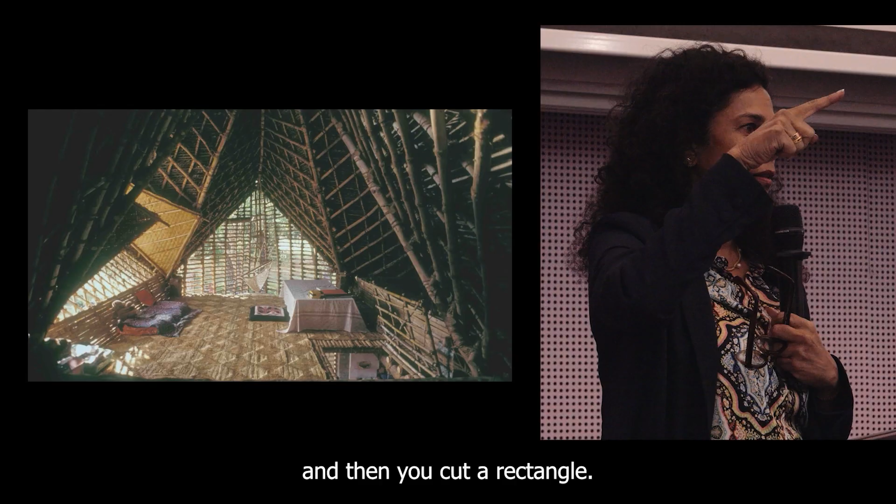The round wood—each tree is unique, but it can be harvested if round in a couple of years, 3 years or so, as opposed to 25 years, after which the tree is so big and then you cut a rectangle. These are questions to be asked by those who are driving efficiency. Is efficiency so efficient?

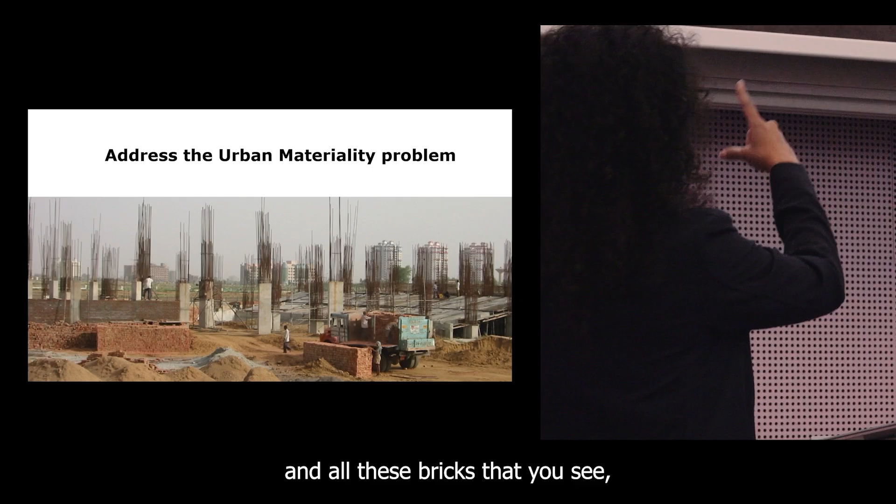Through that kind of model, the West has been driving models that are dictating the urban materiality, which I'm calling a materiality problem in the rest of the world, where even concrete is now being used as a vernacular material, and all these bricks you see are also not allowed to carry load, because alongside there is a new type of regulation world developing that is coming in the way of innovation.

So gravity has not changed, and human biology didn't change much too, yet the codes are changing. So there is this form follows regulations, form follows money—all of these as parallel developments.

In that context, I have tried in my practice to go to the source and understand that a lot of the green rating systems, etc., which are all based on generalizations, are in my opinion all wrong, because they say a brick takes so and so many kilojoules.

It's not true—it depends whether you fire it with what, where the clay is from, how much did you move things around. So a brick is not just a brick, and neither is a stone.

So I have spent a lot of research and time to find out, right from the source, how do you start to move material, and how do you create contemporary architecture with skills, etc., that include all the people who are involved—the analog, whatever we build, however you conceive it. At the end of the day, the material is analog. It will affect a quarry in a place and all the socio-economic and environmental realities that I feel are still being underestimated.

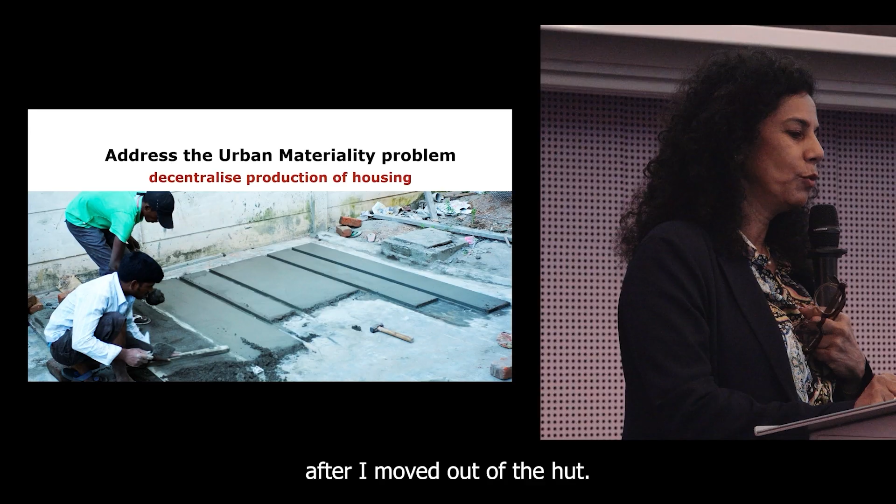There are so many codes and laws. I'm also trying to focus on research that could decentralize the production of housing, just like birds and bees still manage to build their own things. Humans are not—you need to wear hats, you need permits, as if the whole world is a war zone where you need permits just to go there.

So I'm working with ferrocement and other materials, including how to treat them—it's very much focused on the matter itself. This is some of the outcome of that, shown at the Venice Biennale in 2016, I think.

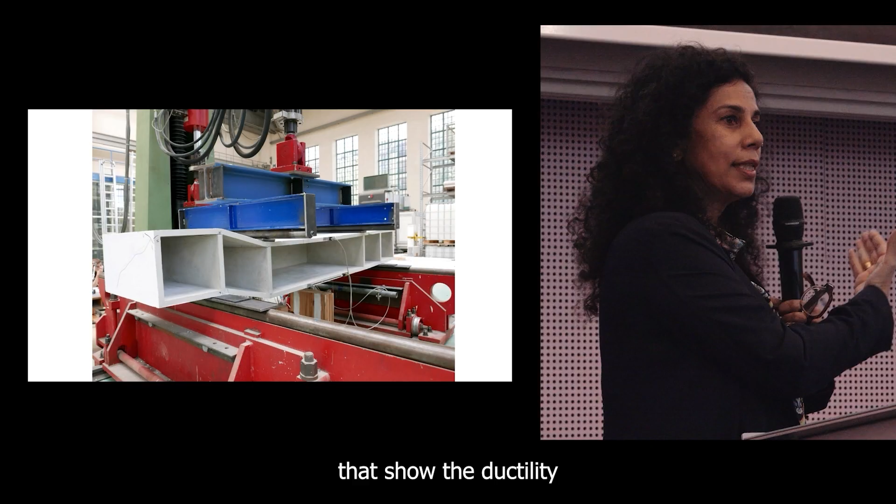We're working closely with Mike Schlaich's laboratory, where we've tested some ferrocement units showing the ductility of the material compared to concrete—it bends instead of breaking. There's a lot of potential for real materiality on the ground, but some of our technological processes may not be addressing this because not enough people with that know-how are rooted in ground reality. So while they're developing knowledge, they may not make a difference in the world—that's my concern.

These are some images looking at how, in the future, we could radically reduce the resources architecture is produced with. I'm looking at crease patterns and origami, using paper as lost formwork, or generating shelter with very little mesh.

I think I should stop here. I don't know, what is the time? One more minute, one whole minute, okay. So I'll just show you some collective housing and some images—I think it's good to show some images.

This is urban waste research, a project in Barcelona. A lot of the urban waste we are recycling into buildings has to do with investigating multiple cycles of material use.

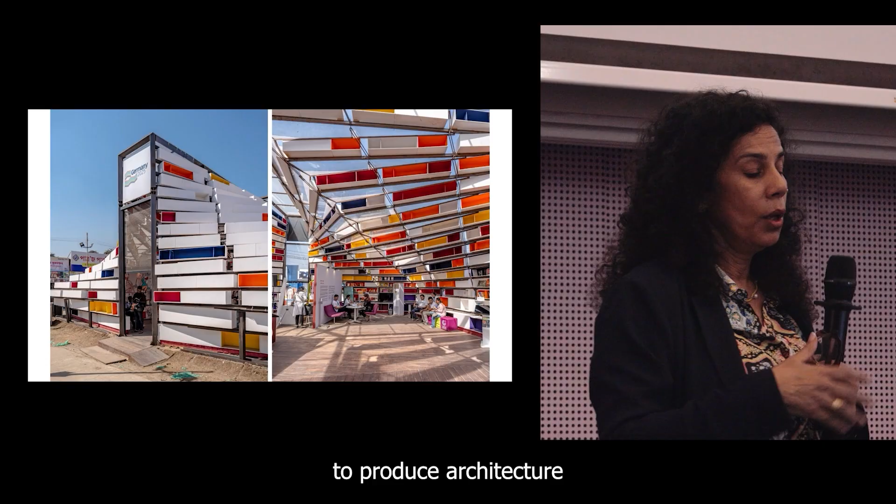My studio project last semester was called Trash is Treasure, because despite 30 years of acknowledging sustainability problems, modern methods are producing way more mess than before, and we continue to call everything sustainable. It's really shocking. We help our students face the back end—we take them to Berlin's trash management to get materials and try to produce architecture that can absorb these materials. I'll end with this last project.

I've recently done a pavilion for the German book fair entry in Calcutta, India, and the whole pavilion is made out of bookshelves, so that even after the pavilion has had its life, it can be distributed all over the city as urban infrastructure. There are a lot of thoughts we are applying for a couple of cycles of work right from the beginning. We know architecture will have its life, and we are working with all these lives.

So I think in conclusion, I would like to say that yes, we do need radical experimentation, but we do need to humanize architecture. Otherwise, we will even lose touch with the problem.

I just want to mention that architecture is a custom-made product, and we have to watch out for over-standardization. When you standardize, there's a lot of waste that comes from the non-standard pieces. Thinking of everything in a standard way also wipes out identity issues and diversity in society, and we really have to watch out for that.

The other important point I want to make now, the rest can come up in the talk, is I think there is an inherent superiority among those developing technologies, and they are alienating the rest of society. So in life, if you talk about life's intelligence, from one cell, by intelligent division, I have been produced, for example. That is the intelligence of life.

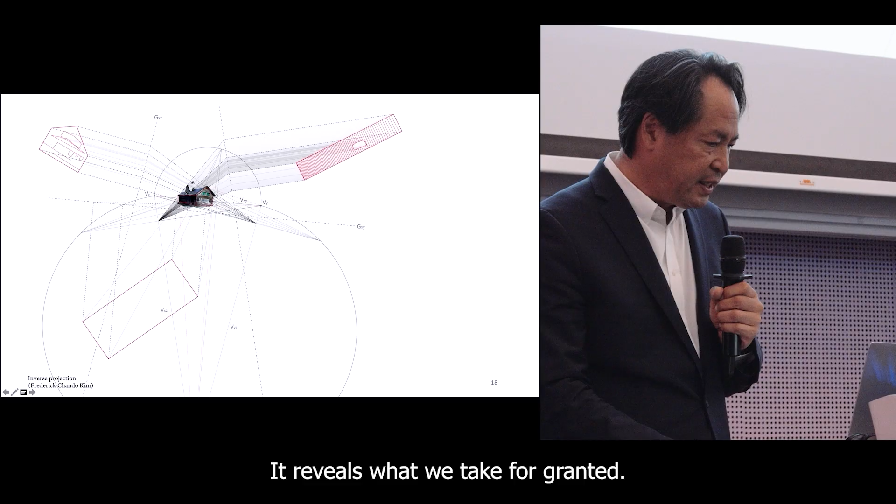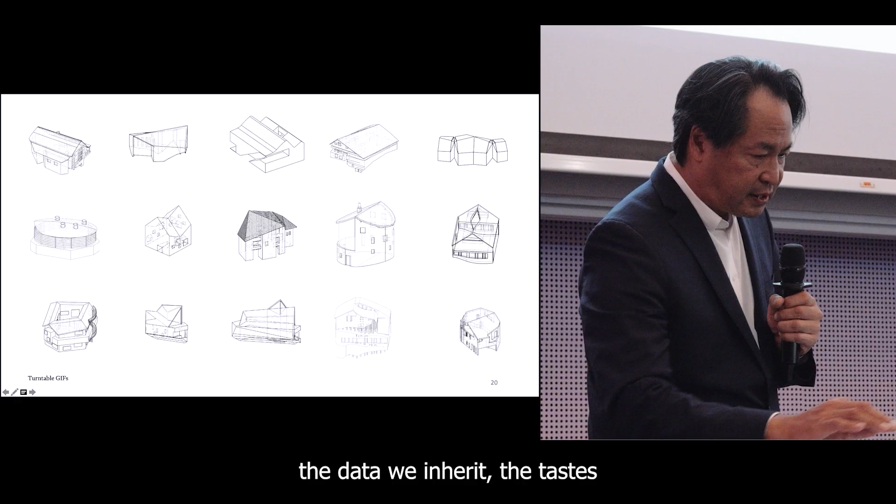It breaks the familiar, it reveals what we take for granted. It is the starting point of creativity. It reveals blind spots, it forces us to confront the data we inherit, the tastes we canonize, the biases we normalize.

Cities too are shaped by patterns, by extending what worked yesterday, urban grids, zoning laws, transport models projected forward. Urban planning has long dreamed of prediction. Models from the 60s promised to forecast growth, to optimize transport, to tame the unruly city. But cities are not machines. They are alive. They move in ways we cannot fully predict.

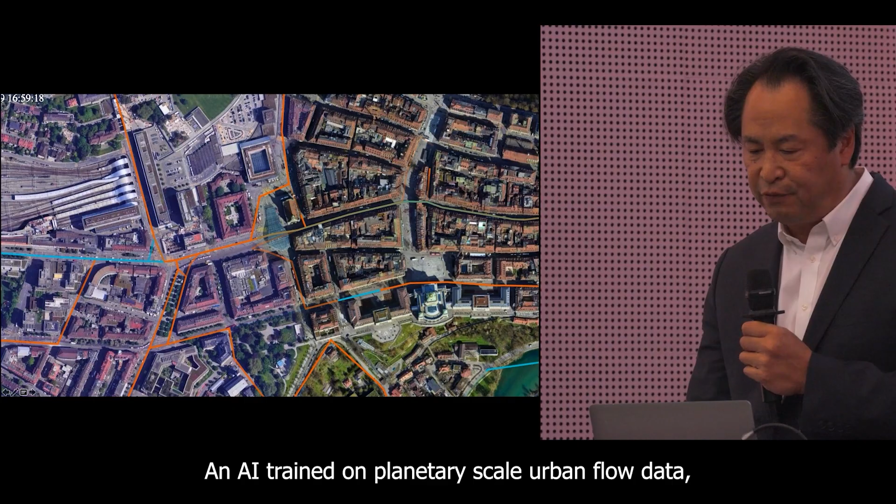Cities are not just forms, they are flows of people, of water, of energy, of animals, of goods, of waste, of microbes, of labor, of culture. This is why we are building a foundation model of urban flows in Switzerland again, the Blue City project. A large flow model, or LFM, similar to LLMs, but not for language, for urban flows. A GPT for cities, an AI trained on planetary scale urban flow data, able to generalize from one place to another while adapting to local specifics, to deepen understanding of cities, to let cities imagine their own metabolism, to open scenarios, reveal dependencies, expand the field of negotiations between planners, citizens, and ecologies.

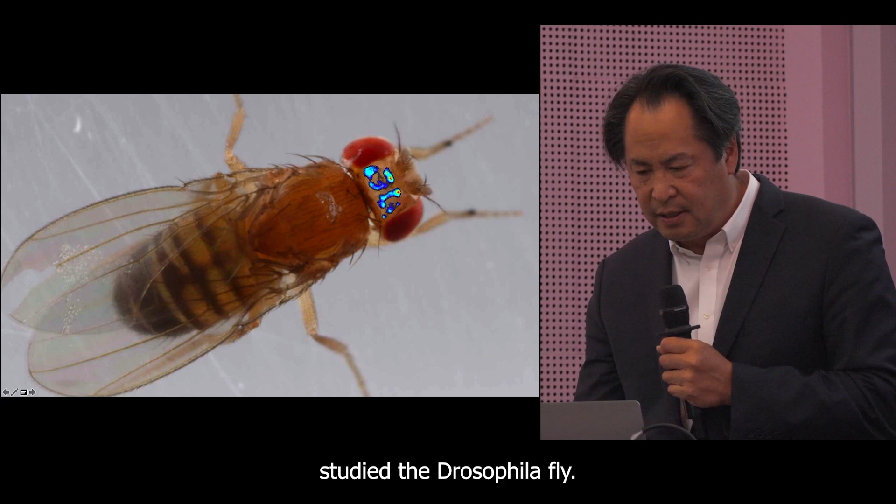Architectural schools ask, what should we teach in the age of AI? Should we train Da Vinci-like generalists or narrow technical experts? Even imagination has limits. At Princeton, researchers studied the Drosophila fly. A mother fly can transport only part of the memory to her offspring, because neurons have chemical and physical limits. Learning is never infinite, not for flies, not for us. Cognitive science tells us we can hold only 4 chunks of information at once. This is the bottleneck of thought.

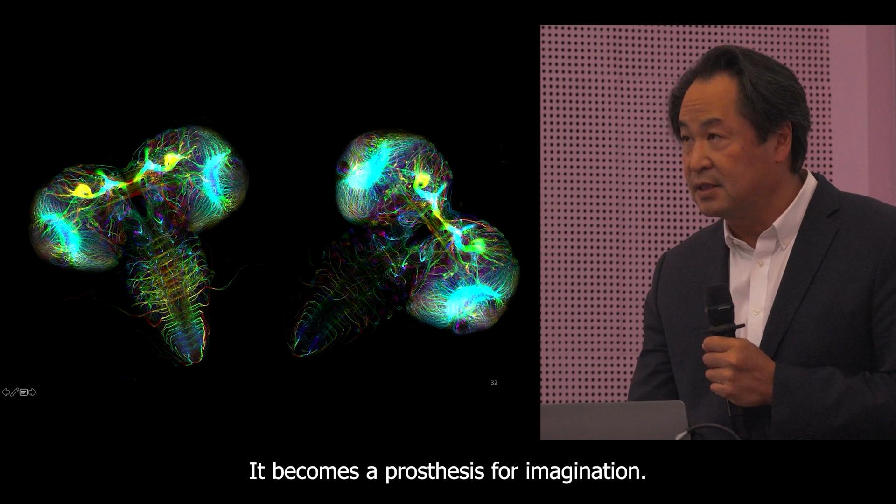AI stretches this. It extends memory, it expands recall, it becomes a prosthesis for imagination. But imagination is not only memory, it is attention. Attention runs on dopamine, and our digital platforms know it, infinite scroll, variable rewards, notifications that spike the brain. What if these same mechanics could motivate and sustain learning? Trigger curiosity, reinforce wonder, spread knowledge like memes, addictive discovery rather than addictive distraction.

Neuroscience adds another layer. Brainwaves can be measured in real time, attention, fatigue, stress. Neurofeedback can help us recognize overload, protect mental health, design better rhythms for learning and making.

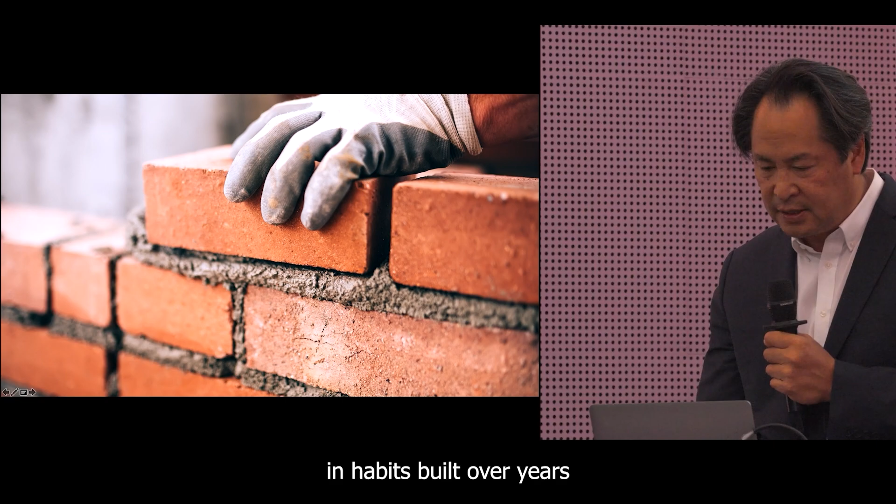Yet some knowledge resists machine learning, and this is maybe a little bit linking to the previous talk, tacit knowledge. The hand of the bricklayer, the tiler setting ceramic, the carpenter shaping timber. These skills are not in textbooks. They are in bodies, in wrists and shoulders, in habits built over years and apprenticeships. AI cannot replace this, but it can extend it, reveal patterns, invent hybrids, extend tacit skill into new futures.

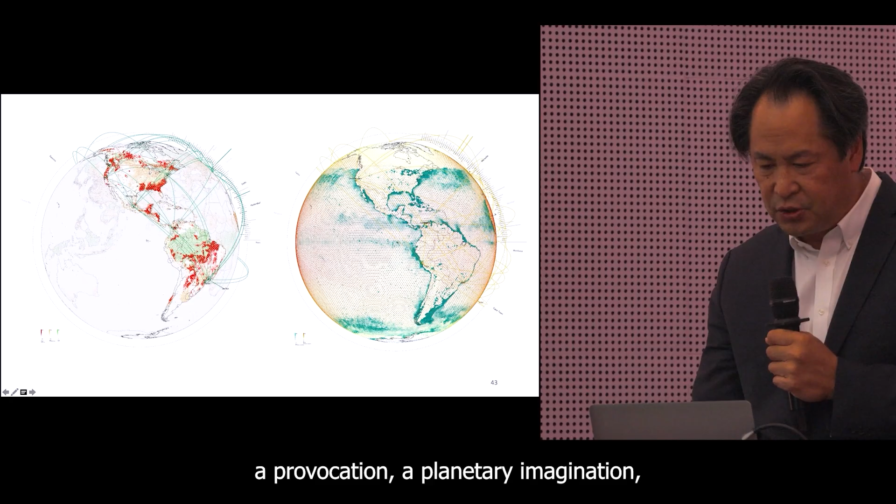So across art, across cities, across learning, AI produces estrangement, a distortion, a provocation, a planetary imagination. A city that thinks and feels with us, a culture that experiments through estrangement, an education tuned to the rhythm of the brain and the dynamics of the crowd. The gift of AI is estrangement, to estrange us from the familiar, to make room for imagination, and to give us back the future.

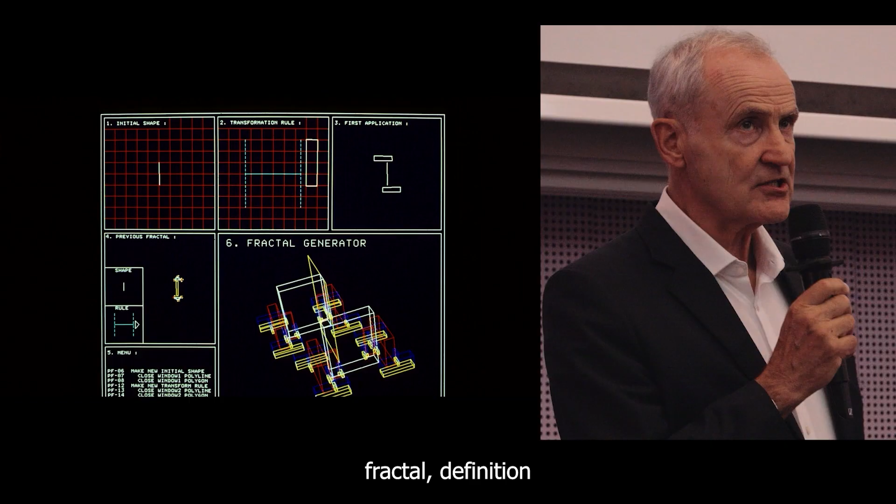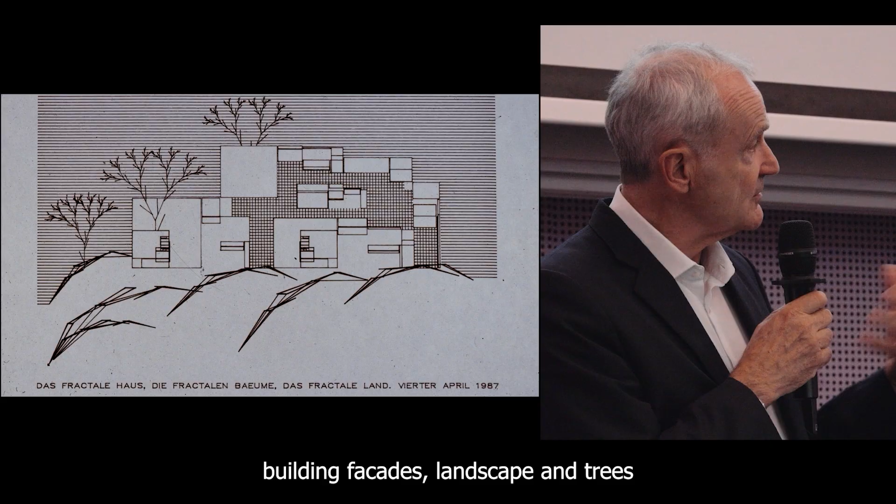We tried to do that and were partially successful. We could do accidents, that were accidents, but we could also produce building facades, landscape and trees with fractal designs by 1987. Then moving to ETH Zurich and jumping into the first chair of computer-aided architectural design, which was really a camouflage for AI in design, which I couldn't say because nobody wanted to know about it and didn't know what it was.

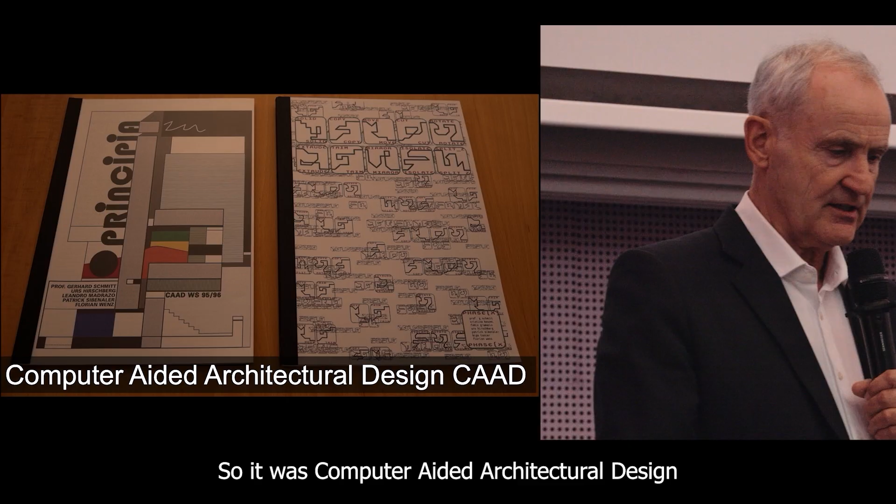So it was computer-aided architectural design with large courses for many hundred and sometimes thousand students. The first use of ray tracing in the objects that were generated, like you generate objects today with your AI programs. But in difference to that, we had to use a structural idea and program the individual parts of the buildings and then render them.

Using neural networks already, as you see at the bottom, shape grammars at the top, going very far also in PhD in this direction. And finally, using case-based reasoning, which was one of the AI methods of this time, very early in 1992, here to actually build also a hut.

And this hut is still standing today, but it's made with renewable materials with 500-year-old oak beams and adobe in between. 1995 was already the interaction with one-to-one design objects, also created with, one would say today, AI methods.

And these were objects that we had to project in huge arenas. That's why it was very expensive. And we had goggles, of course, like you sometimes have today. And we simulated gravity because it was very important that people could understand working with that.

I just found this by accident 2 or 3 days ago on the internet, a new design studio, we called it. The core of the new design studio comprises intelligent objects in a virtual reality environment that exhibit different behaviors drawn from artificial intelligence and artificial life principles. A part already realized in the tool called Sculptor.

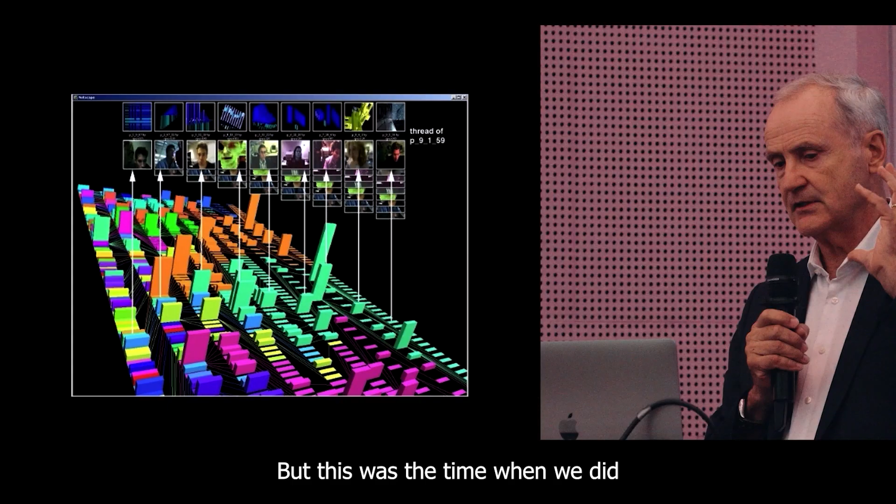Make a long story short, these were the people who worked with us, and they were very serious because they were worried, because they had to make all these decisions, and they were very successful afterwards. But this was the time when we did memetic architecture, phase X it was called, and on the left side you see the first phase, about 200 students.

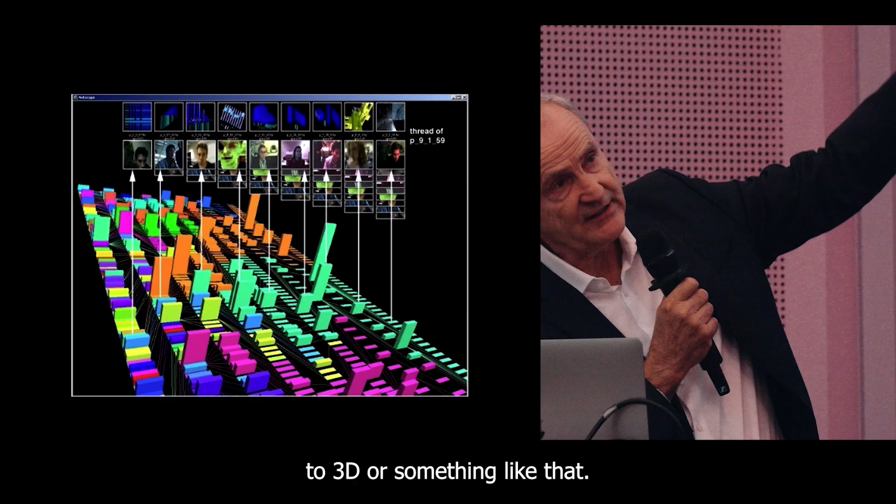Then in the next phase they had to go to the next level of dimensionality from 2D to 3D or something like that, but they couldn't continue on their own design. They had to take somebody else's design, they had to pick the best and continue on that design then further, and the next phase again and again and again.

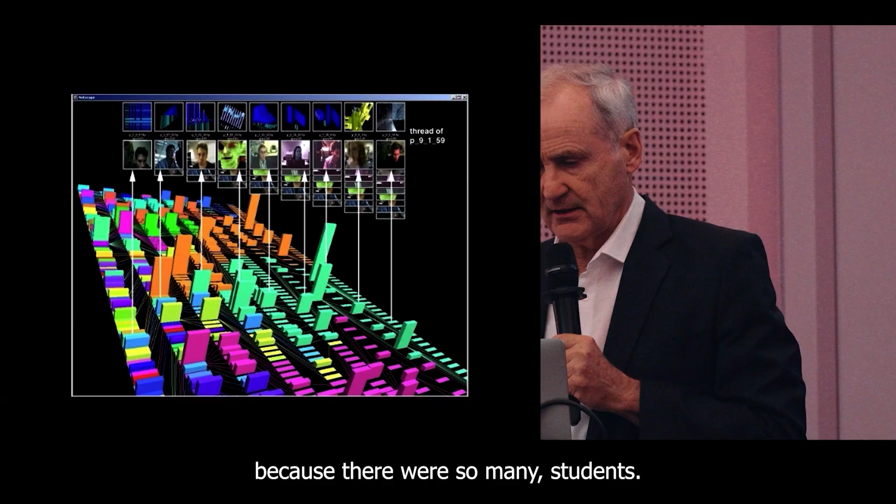And on the right side you see only 3 or 4 colors. That means all of these designs were in the end dependent on these first ones. And they had, as I said, no Facebook or something, so they had to make their own representations. They graded each other because there were so many students. And more this course evolved in different representations and presentations.

But again, this was 1995, so 30 years ago. And very big tests on how this would develop, how the memes would travel through the system, and so on. We came to a point that AI, complexity science, and scales collided.

That was much later. And maybe a few words to complexity science, why we think it's important. Complexity science combines many of the AI methods with methods in architecture. And it is also very much related to societal problems.

So you can see foundations of complex systems, societies under stress, societies in transition, and metabolism of societies are all topics that are worked on in this Complexity Science Hub in Vienna today.

Quote: AI provides computational tools to model, analyze, and predict complex systems, while complexity science offers theoretical frameworks to guide AI development toward more adaptive, robust systems that can navigate real-world complexity.

And the real-world complexity is starting everywhere. The forest is a complex system. The wood is a complex system.

We're getting into the bookshelf story, because that was created by students in the studio before, and then tried to build it in reality afterwards, using only local material, but still cutting it in boxes. And that went all the way to Singapore, where we tried robots at a smaller scale in the Singapore ETH Center, and had high-rises built by that.

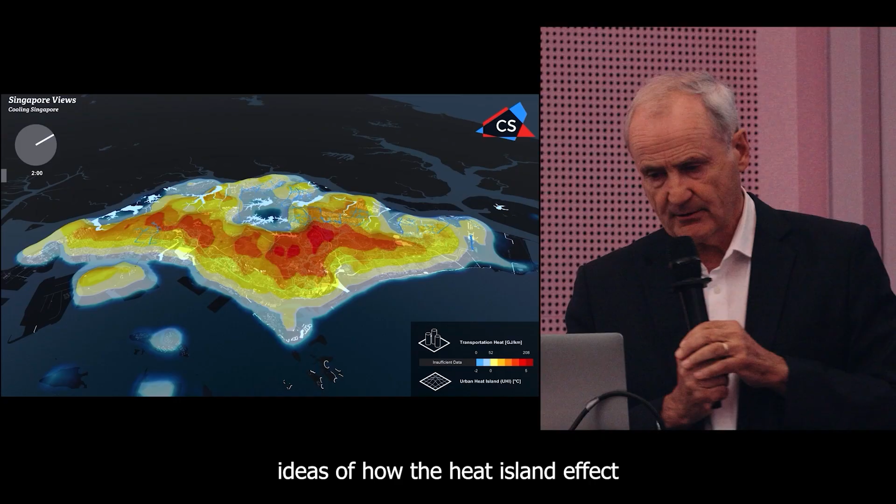Of course, Cooling Singapore, also a project here in Singapore, was using AI and also a lot of complexity science already. Many people were involved in this, maybe some of them are here in the room, leading to these very important maps and ideas of how the heat island effect in Singapore is developing over time in different parts of the city.

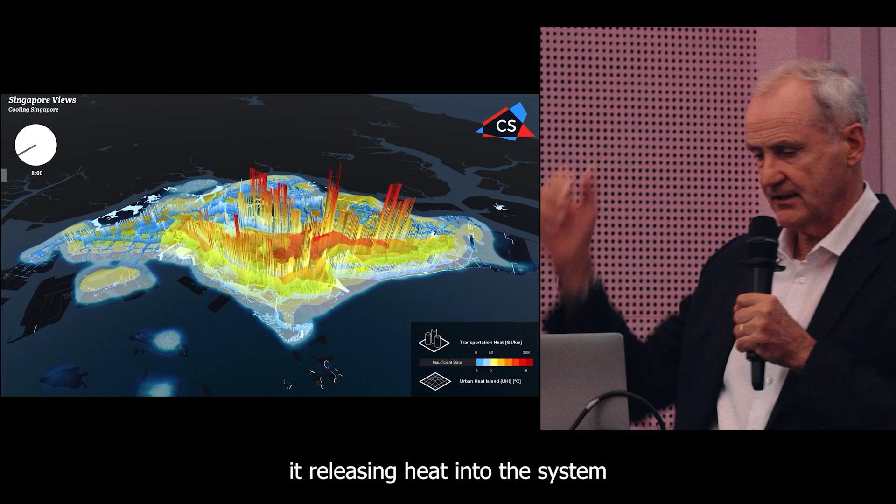And the cars starting to drive in the morning release heat into the system that then also contributes to the heat island effect.

But now, what comes after AI? Imagine AI is commercially successful, as the internet was in the 90s, and social media in the 2000s. Imagine it has become ubiquitous and forms an additional human cognitive dimension. What goals could be achieved for society and design? Because we cannot just keep going, it would be a waste of material and everything, as you heard before.

This is our concept of how it could move. We move from smart cities towards responsive cities, and from sustainable cities towards generative cities. In between, we have this thing called citizen design science, which is comprised of citizen design, design science, and citizen science. Many case studies we made in this context to prove the capacity of this concept.

We found out with this, and I agree with many things which were said in the last days, we have massively underestimated the capacity of citizens - and I mean citizens, not experts - and small, medium enterprises to employ AI tools. There's a huge power behind that.

And citizens in the past, they had this power too. The Ponte Vecchio, of course, in Florence, many know, already employed citizen design science - this combination of these three factors.

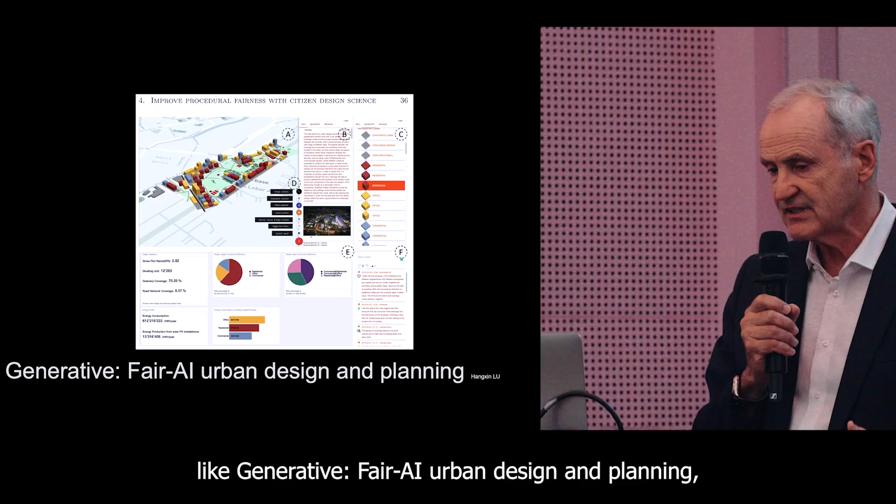But more important are new things like generative, fair AI, urban design and planning algorithms and programs, a PhD by Hangxin Lu here in Singapore and in Zurich, to improve procedural fairness with citizen design science in making new city proposals. It can be used in many aspects. You can also see here it's in Paya Lebar have interest in that, and it's really working quite well. Or in Java, where so many new places are being built and have to be built in Indonesia, this is also a good opportunity.

I want to come to the conclusion. Empower citizens, we think, is absolutely necessary. With citizens, and this is like saying, please do that. Design co-governance between people and machines. We have to face the situation. It can be very beneficial. Educate students to become responsive citizens of the world with AI as cognitive dimension.

Design AI and destruction AI are very close. Robots and drones, you see what is going on in the most modern wars at this time. So we have a big responsibility if we use these tools, because they can always be used for the opposite.

Finally, to go from smart cities to responsive cities is very important. These are places where the inhabitants of the city do all the work in culture, in education, and so on. They face the problem sometimes of shrinking cities, which this part of the world is not facing yet. But with this, responsive cities can be a very good answer. And sustainable cities, move it to generative cities that make more with less and lead to a good future.

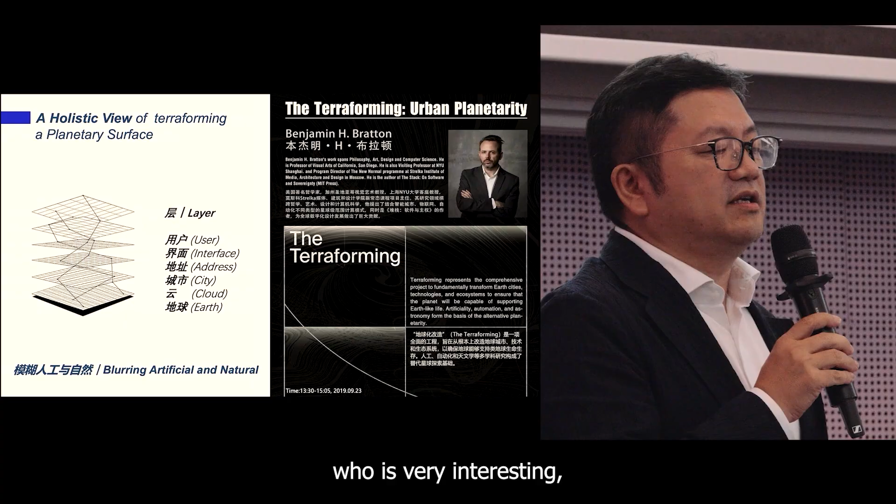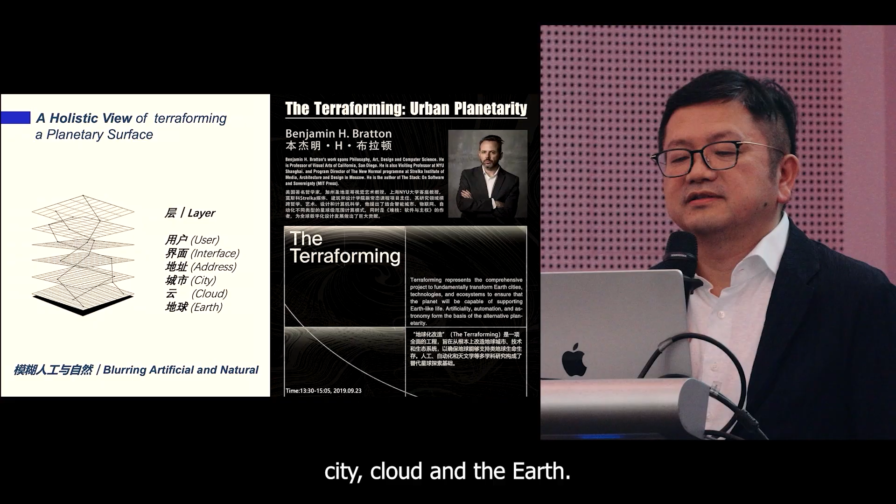Another philosopher who is very interesting, Benjamin Bratton, I invited him to Shanghai before COVID, in 2019, and he gave us a special lecture series on the holistic view of terraforming the planet surface. He categorized the planet not by country or nation, but by different layers, including the user, interface, address, city, cloud, and the earth, blurring the artificial and the natural as a perspective for terraforming and stacking the future urban planetary.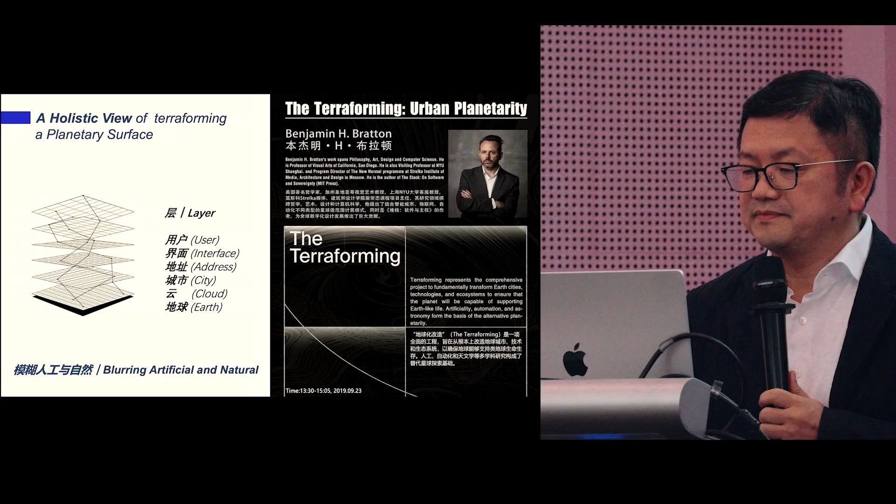This goes back to the history of AI, which Mario Carpo tried to map over the past 50 years, showing different trends happening right now that are booming. I would like to position what I'm doing there. My neighbors are Philippe Block and Gramazio Kohler. I think we're doing digital fabrication or digital tectonics.

Over the past 15 years we organized a special event named Digital Futures. Year by year, we now have almost 25,000 people participating in this event.

Two years ago, we put forward a special topic named co-agency, co-pilot, and coexistence. I'd also like to address this thinking to another philosopher named Yuk Hui, who used to stay in France for over 10 years but is now teaching in Hong Kong. I think co-agency is kind of the future.

I was talking about biospheres, because we humans have our brains, design skills, and imagination, but parallel to this, non-human intelligent agencies also have similar skills compared to the human body. So co-agency will be the future—how to integrate the human and non-human.

The co-pilot is like a toolbox of instruments, so we're talking about the technical sphere. It's super important that we don't just share ChatGPT or other AI platforms that everyone can use toward optimal solutions. Instead, we try to explore and develop different co-pilot platforms that should benefit future education—how we can address education for the future.

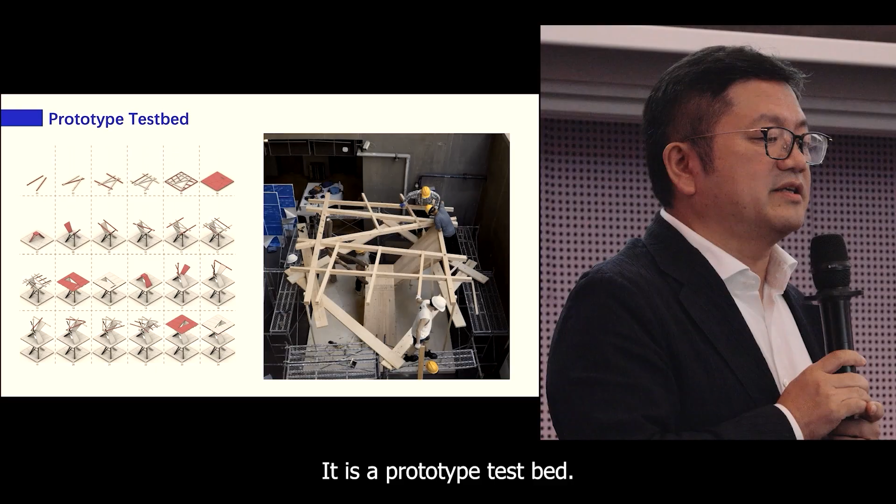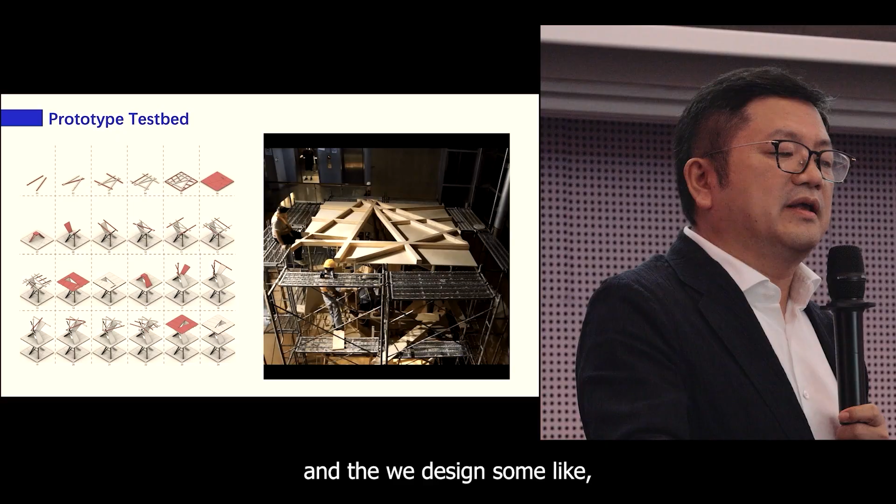Also, every year we have a tower—a prototype test bed. We collaborated with KU Leuven, supported by national funding, and designed a pavilion totally based on graphic statics, introducing this knowledge into structural performance, simulation, and optimization. We have a bundle of solutions, but the final testbed was constructed in only one week.

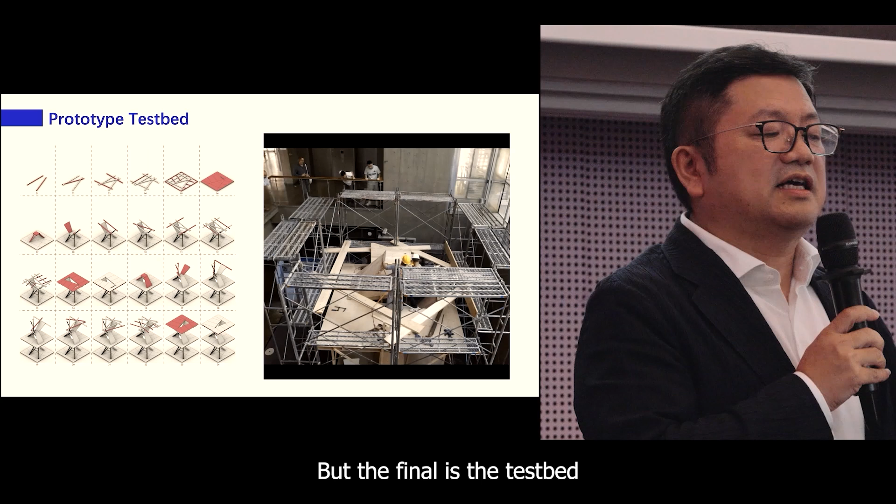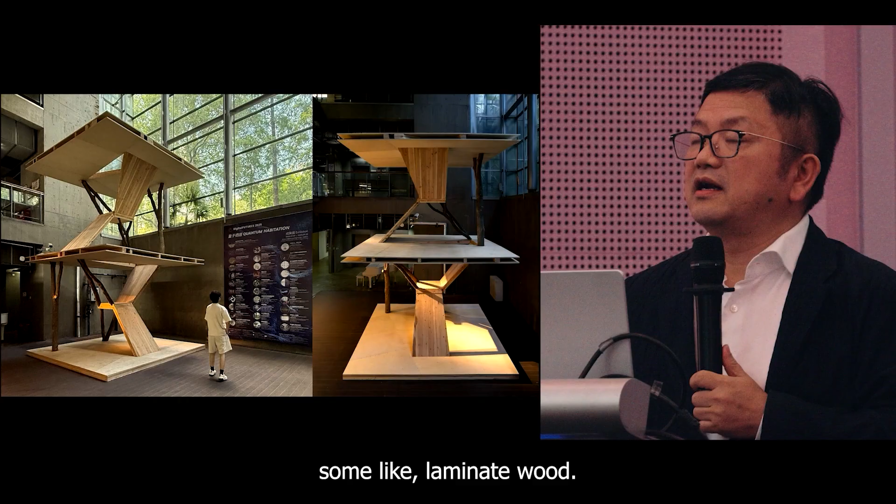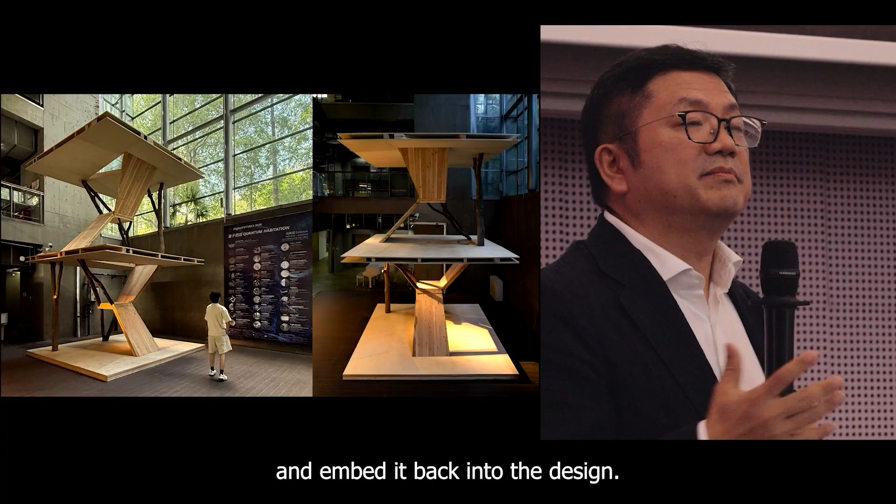This involved special materials, including bar material, natural wood, and laminate wood—an integration trying to produce structures based on technology but more than imagination, where people can collect waste material and embed it back into the design. So technology is hidden here, not standing in front, but it actually helps and enhances a lot.

This year we had more than 500 people coming to join us in the workshop. We asked for their approval to take photos of around 400 people, and we tried to generate special digital future faces—digital future eyes and digital future face.

Using AI tools, we project it through 4 projectors onto the facade of the entrance of my school. So I think it's kind of an implementation, a design for the community culture we try to establish in Shanghai.

Over the past 3 years, we also established a journal named Architecture Intelligence. Over 90 essays have already been published, and Emmanuel has published 2 of them. We try to promote researchers around the whole world, exploring different possibilities for introducing architecture intelligence into both practice and research. The topics were 3 scenarios for architecture intelligence: smart habitation, virtual habitation, and quantum habitation, which is a new platform based on evidence-based architecture research methodology, all the way to sustainable development.

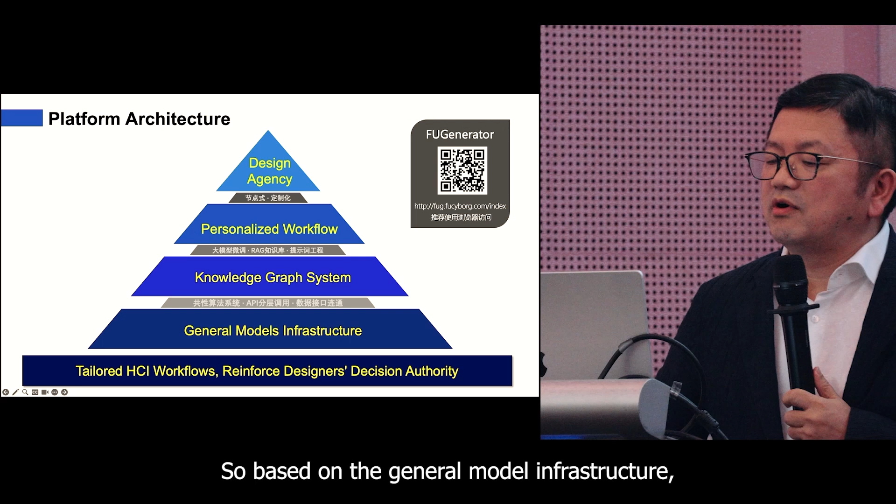So this is FUGenerator. I've briefly introduced the framework, which is also a platform architecture, a special framework. Based on the general model infrastructure, we introduced a knowledge graph system into this platform, and we also introduced a personalized working flow, a pipeline that could be defined by designers.

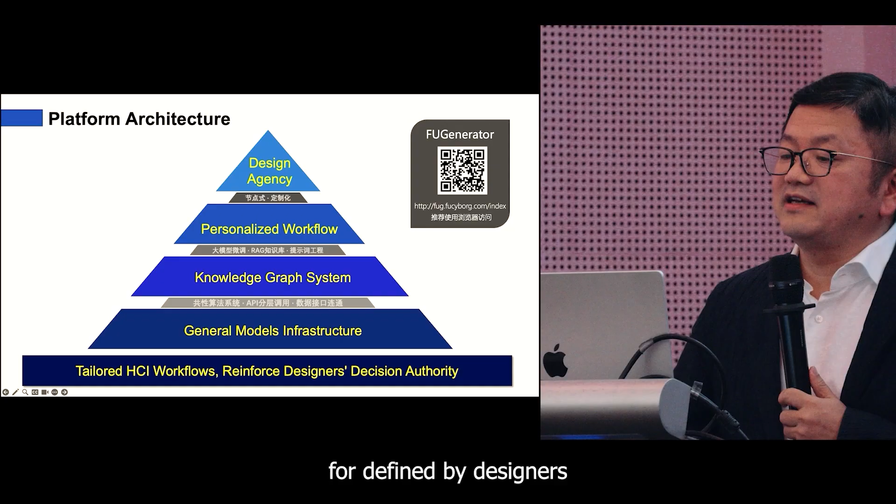Multi-design agency was developed on this platform - it's a tailored HCI workflow that reinforces designer decision authority. We especially put forward the data architecture, how to organize the data, which we name spatial data information modeling. This is fundamental, the main knowledge for how to operate this platform, FUGenerator.

The architecture intelligence data framework for the high dimensional data-driven geometry generating process should be defined by multiple dimensions - how to categorize this kind of data, and how to categorize different data based on this platform. This is the special toolbox we developed on this platform.

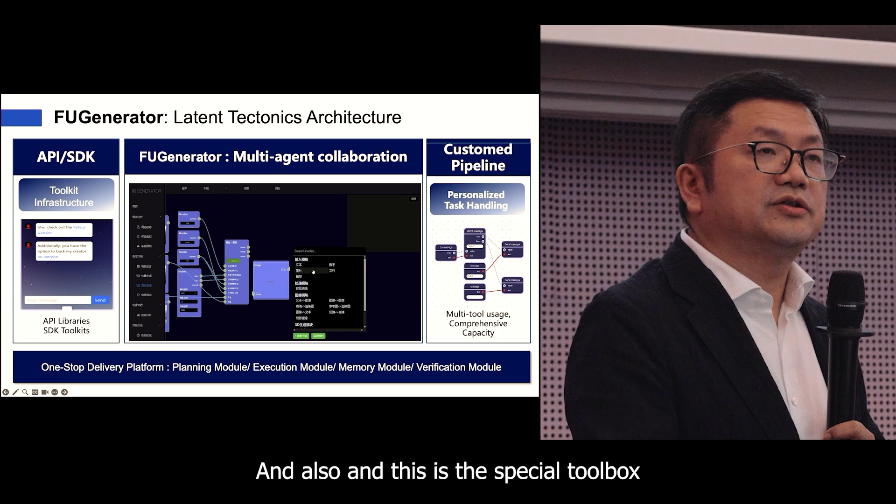FUGenerator is a latent tectonics architecture, a bundle of multi-agent systems. We try to introduce all these AI libraries and SDK toolkits into the design working flow.

This multi-agent system can help us custom a pipeline to personalize task handling, and multi-tool usage could build some comprehensive capacities. This is a one-stop delivery platform, actually developed by several - right now more than 10 PhD students are working on that.

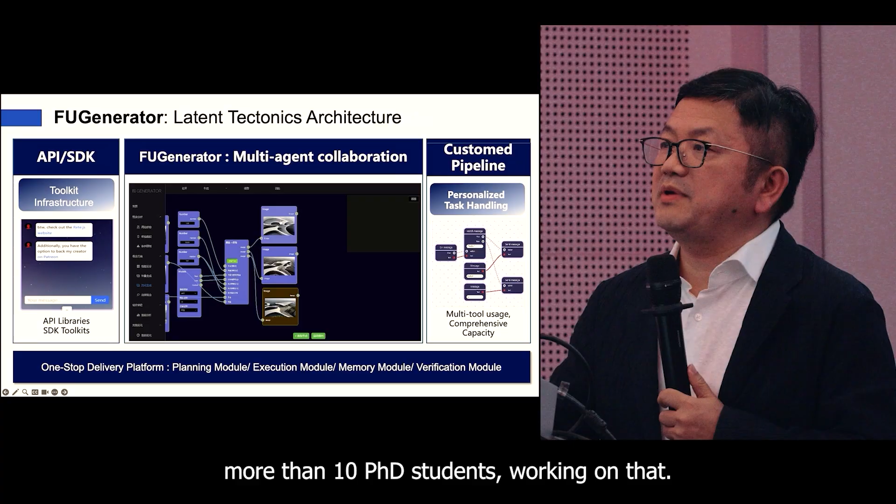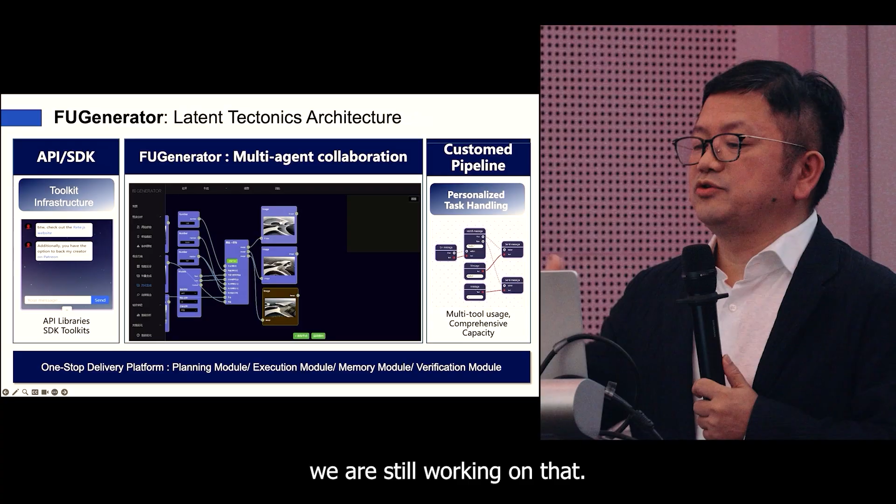We categorize the planning module, execution module, memory module, and the verification module. In the future we are still working on that, and we try to introduce more people to work with us or share with others through this kind of AI platform, especially customized for the mind and hand collaboration for future designers.

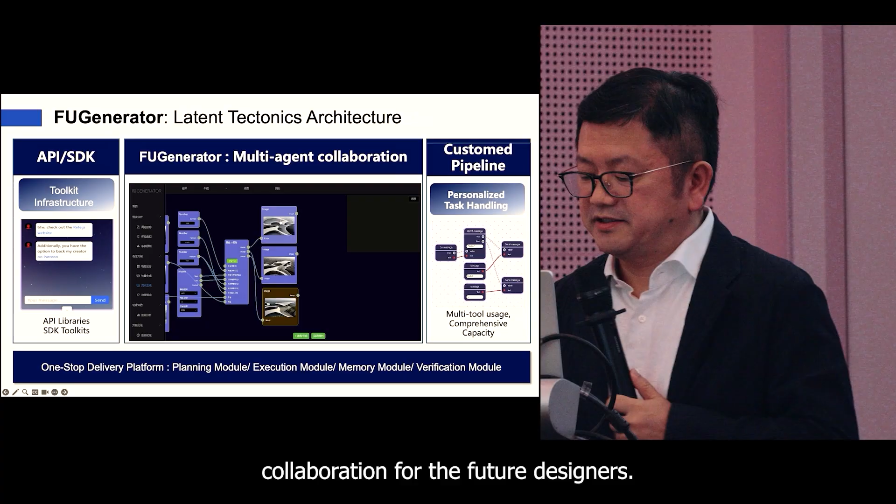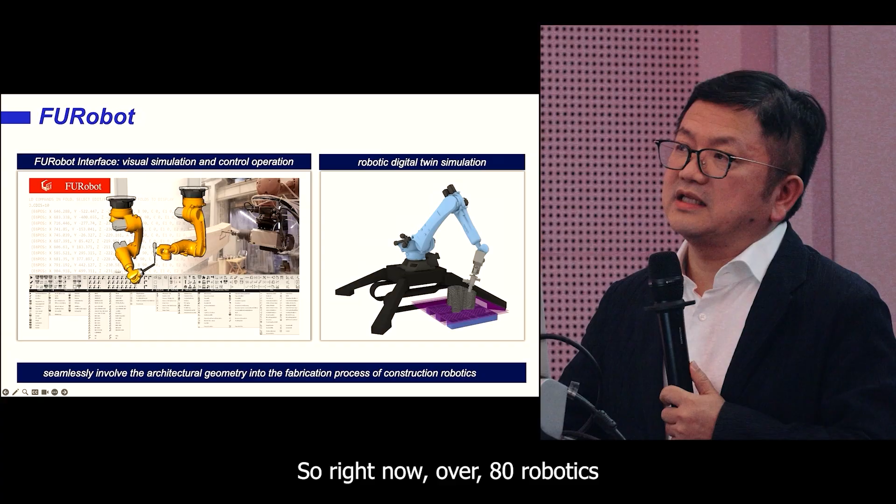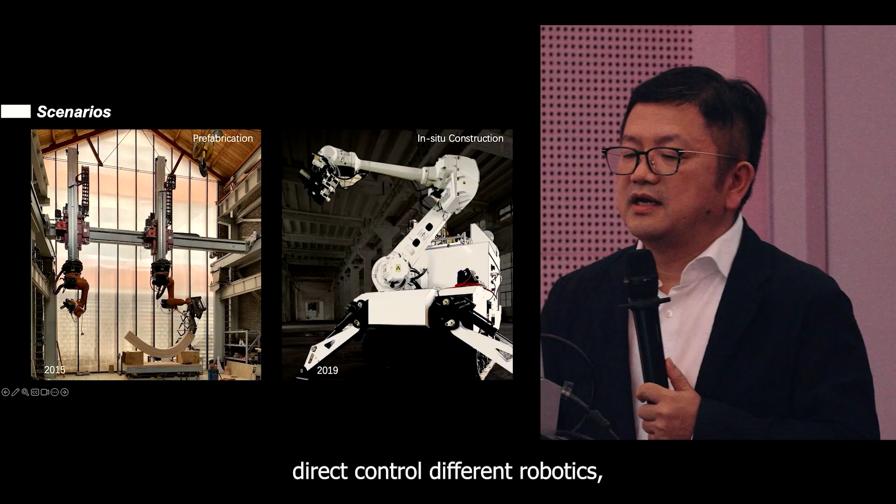We also designed another software platform named FU Robot. We've been working on that for around 9 years. It's like a one-stop seamless connection from the architecture geometry all the way to the tool paths of the robotics. Right now over 80 robotics users from all over the world are joining us in this community, which can output robotic digital twin simulation to directly control different robotics. We're also making hardware as well.

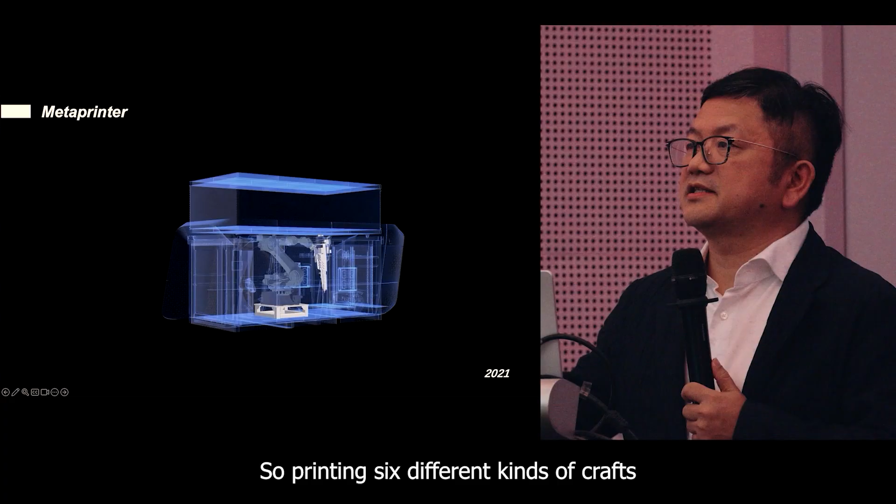In 2015 we developed the prefabrication gantry robotics, and in 2019 the mobile robotics. During COVID in 2021, we also designed this kind of mobile robotics 3D printing - 6 different kinds of crafts could be integrated in this box and transported to different construction sites.

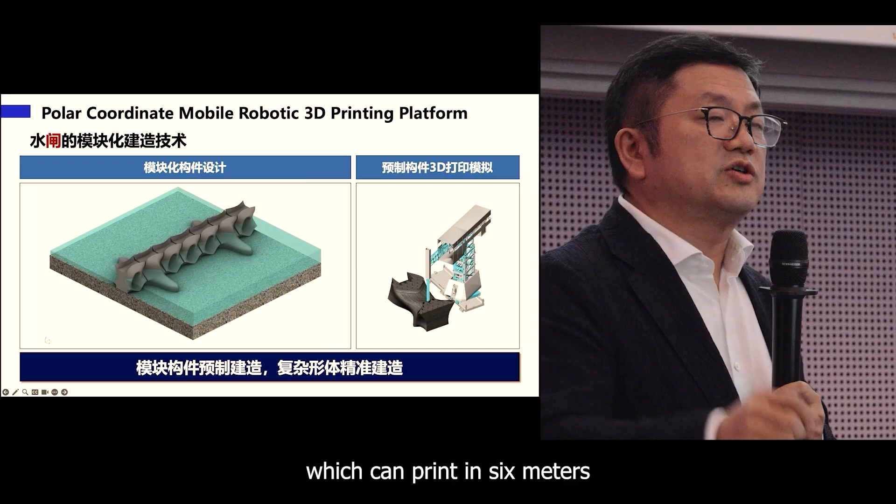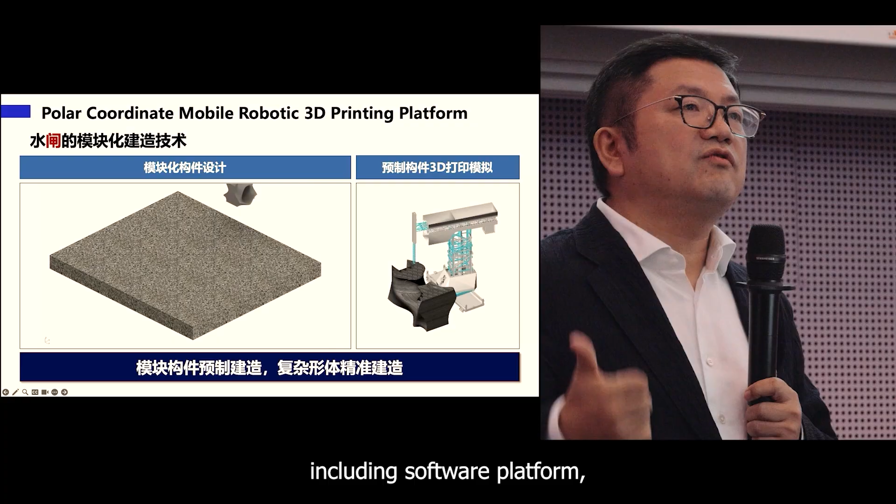What we're now working on is a polar coordinate mobile robotics 3D printing platform, which can print 6 meters high, 6 meters cantilever, big structures and scenarios. These are the common knowledge we built in our group, including software platform, hardware platform, and thinking methodology. I would like to introduce some examples of how we implement all of them into reality.

So this is the Venice Biennale 2018. I introduced this project, it's crafting robotics in the age of AI. This is a timber structure we generate by a special form.

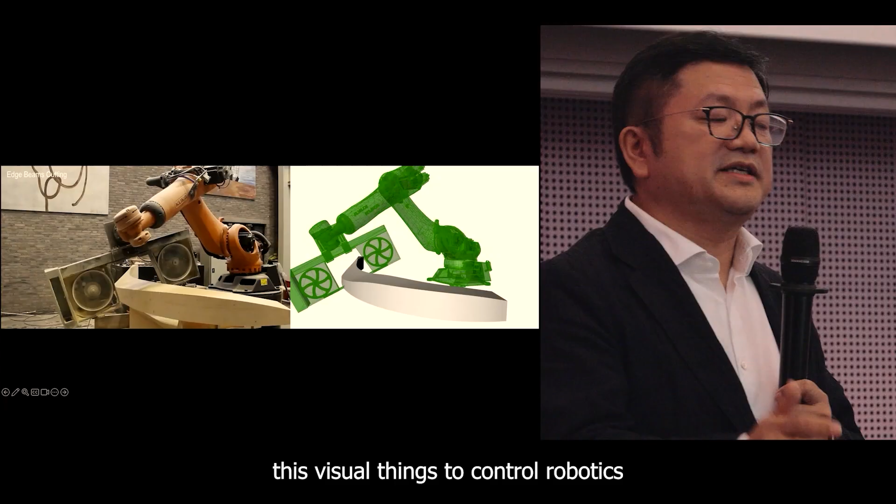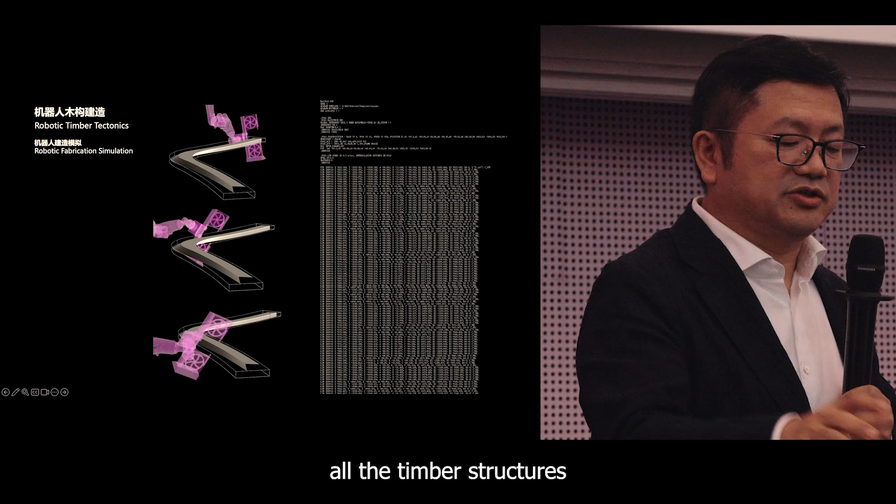At that time, we tried to program digital twins to control robotics by simulation. The detailed drawing is not by hand, it's something like this - scripting sent to the robotics to help us build all the timber structures in a very short time. The whole building was constructed in only 52 days in the rural area of China.

So we named it in bamboo. You can see the local material, which is based on the new geometry, prefabricated by the robotics.

This is Philippe Block working with me over the past few years. We collaborate teaching in MIT, so this is traveling studios. We introduce 3D printing for the scaffolding because for this kind of shell structure it's extremely wasteful. For example, if I talk to Sejima, they spend a very large amount of timbers on the scaffolding.

But to implement the custom geometry folding technology, we can very accurately print the geometry of the supporting scaffolding for this shell structure. We take away and reuse this kind of 3D scaffolding for a special, very thin structure.

After 6 months, we implement this technology to construct a 45-meter span shell in Zhejiang province, Wuzhen. The width of this shell is only 15 centimeters, so it's like 1/3 of an eggshell. So it's what we achieve by research - it's switched from research all the way to the practice.

Last year I presented this project in Buenos Aires Biennale, which is a non-local locality. The non-local is actually a technology, it's a global technology. Locality is the construction site, which is facing a rockery and also a pond on very different height contour lines, a landscape.

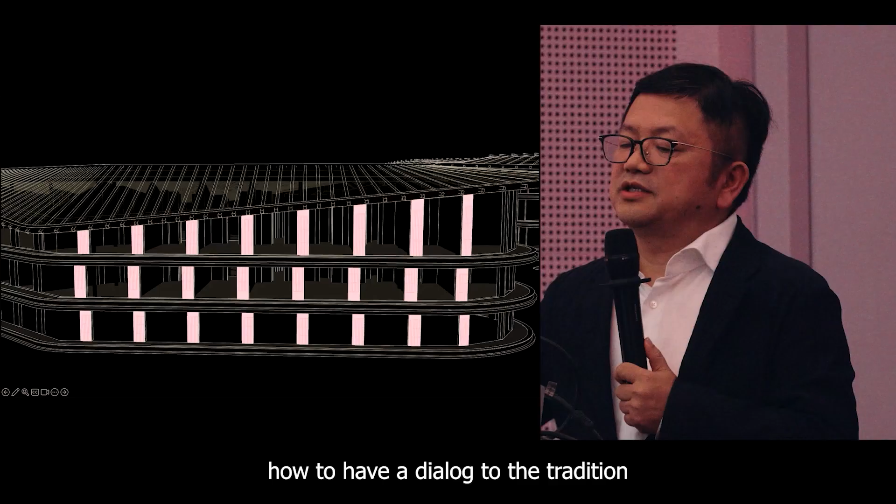So in this project, we want to introduce how to have a dialogue with the tradition of architecture in the drawings. This is the images we're collecting. So the design is in 2019.

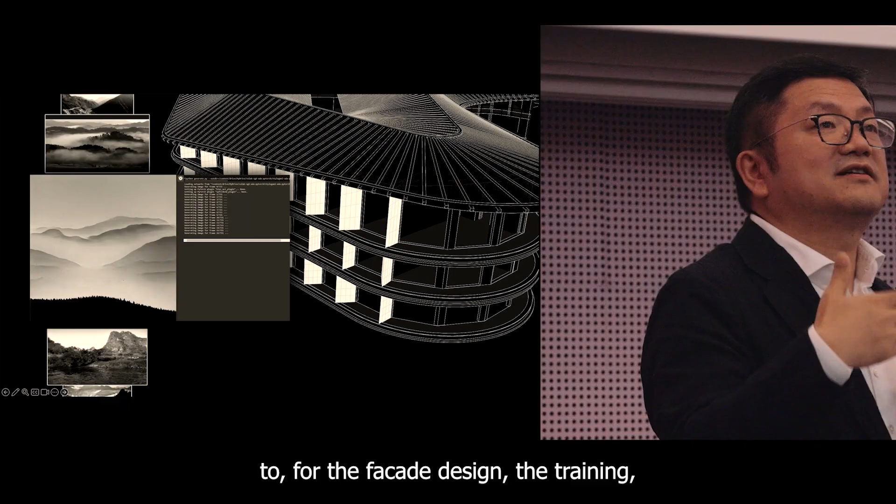We introduced StyleGAN at that time for the facade design, training the data set for this kind of Asian Chinese drawing, projecting it to the facade and trying to translate this kind of grayness into the rotation of the bricks. We introduced robotics - 6 robotics in 4 months - to construct the whole building.

You can see this elegant facade system is kind of a representation of the landscape, an abstractness we try to fabricate. In very close distance it's very elegant, but accurately constructed by robotics in real practice.

This year I also got an invitation to participate in Venice Biennale. This is a project I would like to introduce. We named it Poesis - a primary future of architectural intelligence.

We should be rethinking how to recycle or reuse material, because the trees are blowing down. My PhD student, leading the team of my students, went to the urban forestry to scan and collect all these kinds of branches and think about reusing these waste materials.

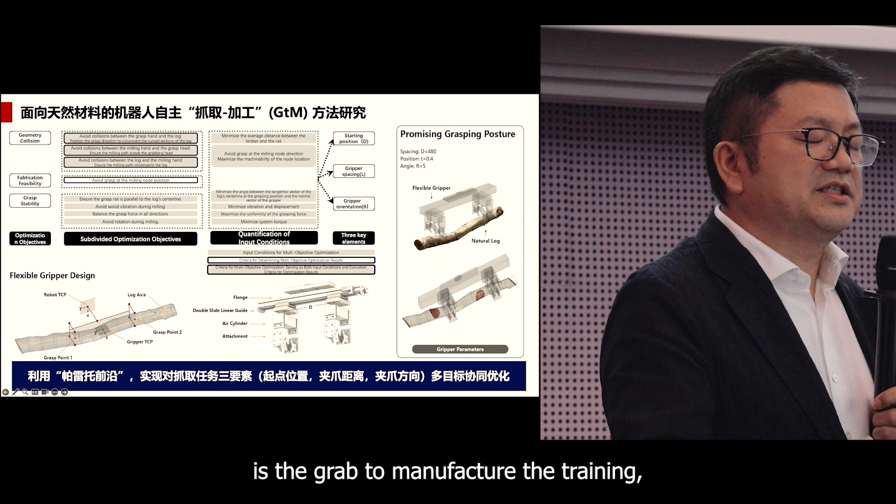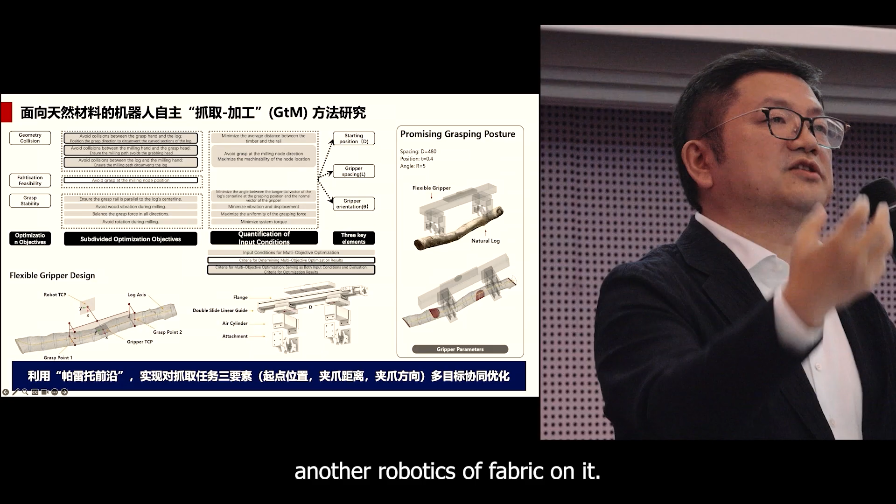We're also training a special data set, introducing GtM, which is grab to manufacture, to train the position of how to grab these different pieces - the timber, the branches - and also introduce another robotics to fabricate. So it's training a data set to efficiently handle every piece, since each of these branches is different.

We also introduce AI to stack all these structures and materials by their length, their width, and their structural performance into a geometry system. We collected almost 600 pieces and implemented around 500 pieces into this special pavilion.

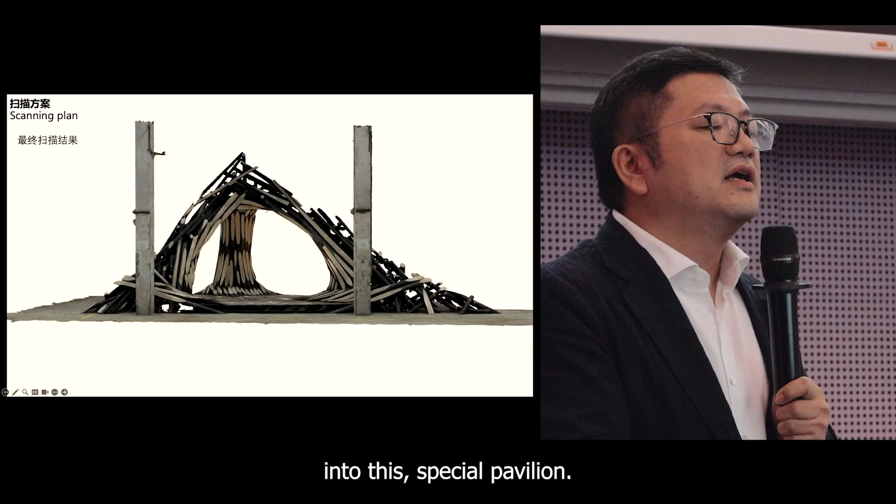This was prefabricated in only 1 month in Shanghai, after Chinese New Year, because the time is very limited - normally for Biennale, the time is very limited. So it's about how to prefab, and fab again.

We introduced VR for accurate positioning - they wear glasses for the modeling. In Venice, we spent only 6 days. The workers are from Milano, and they can follow this model to accurately position all these prefab pieces for this pavilion. There's a video here trying to introduce what we're doing.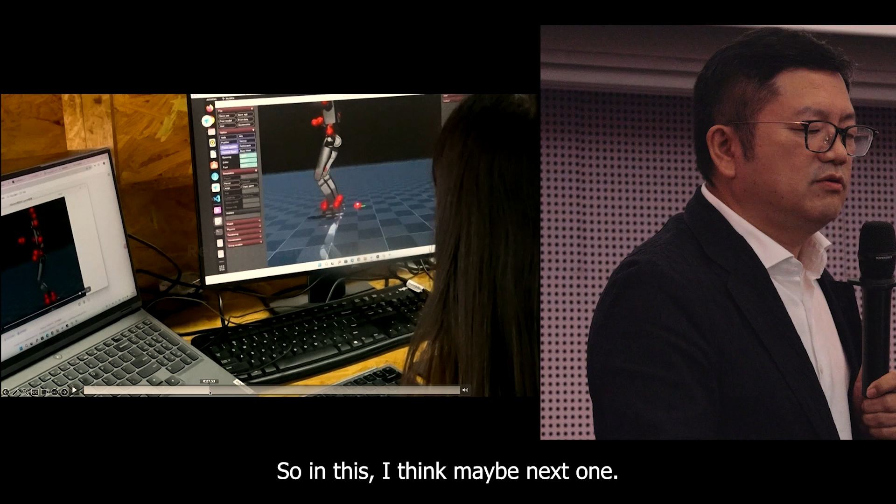Oh, not this one. Okay. Maybe time is not enough. So in this, I think maybe next one.

After the opening, we're also collaborating with MIT, ETH, and University of Torino to make a workshop collaborating with Gramazio Kohler to train this kind of humanoids. It's an MIT team, and also how to introduce this new technology in training the robotic, the humanoid behavior, and integrate with human behavior in the Biennale. So we have 3 groups of students coming in over half a year to Venice to learn how to train the humanoids.

I think time is not enough. It is a training process.

So we teach all the PhD students how to make use of the software we develop. And the humanoids can be trained stepping on the stairs and can shake hands with people, and also, by LLM, can talk to 6 different people in 6 different languages in the Venice Biennale. So this is a workshop.

Okay, this is a pavilion. We first introduced humanoids into the Venice Biennale, and also shared this platform with different universities.

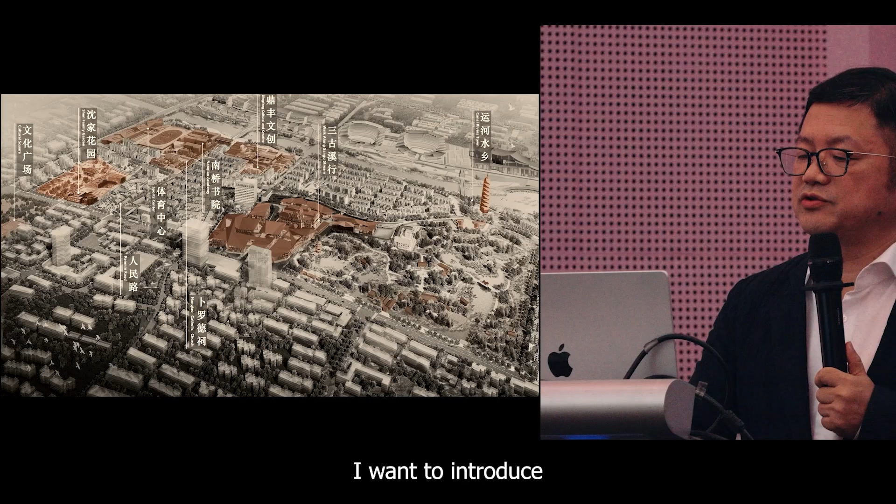Last but not least, I want to introduce the real project, urban renovation in Shanghai. We designed a bundle of projects, but today only one project I want to introduce. In the extremely hot summer last year, we spent only 4 months to prefab and construct this kind of urban renovation project inside Shanghai.

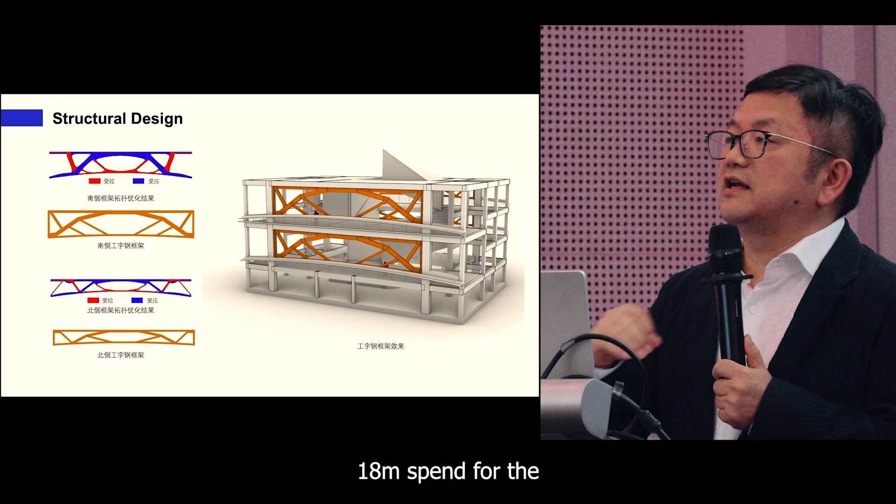These are real photos. It's based on the structural performance because it's a museum. So we need an 18 meter span for the light, to introduce the light into the exhibition space. So how to handle the super heavy brick facade, because it's a historical area - we try to have a dialogue with the environment.

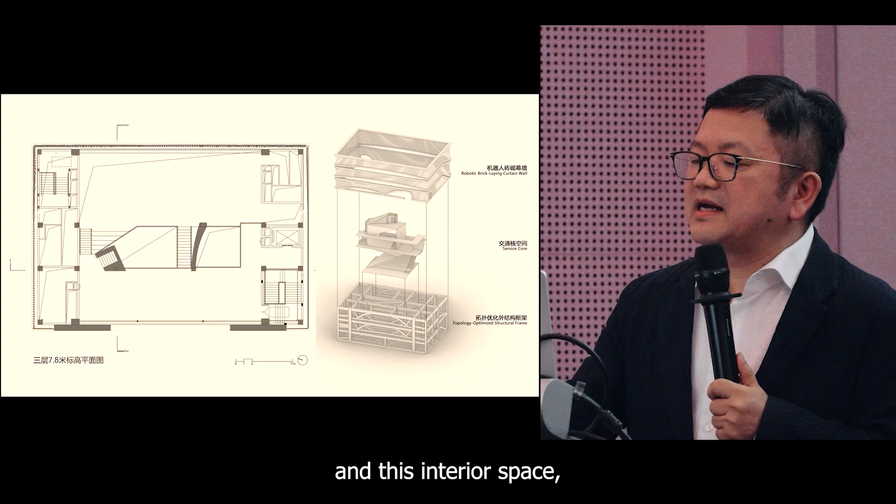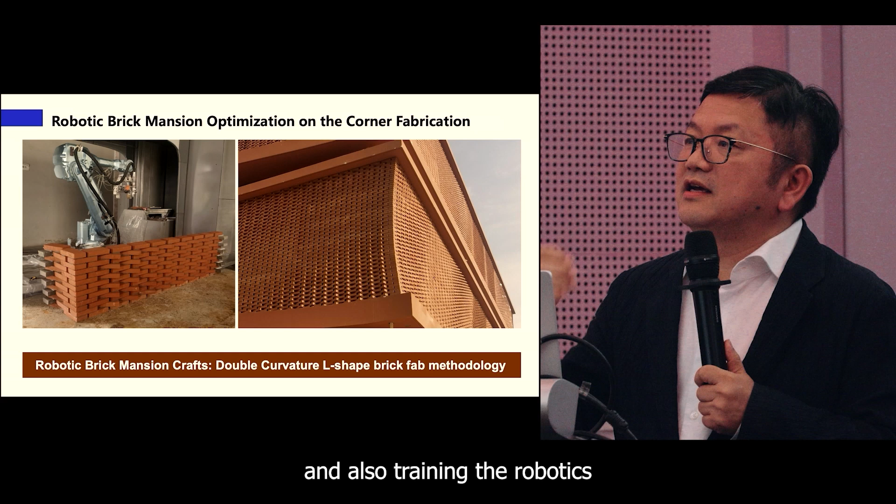So all this is custom, also the interior space, something like this. So this is one corner, just as an example, because it should be based on an accurate formation process, and also training the robotics to fabricate accurately and efficiently on site.

So we introduced this mobile robotic platform onto the construction site. And this is the construction process, an automatic construction process, implementing robotics to fabricate such kind of accurate constructions.

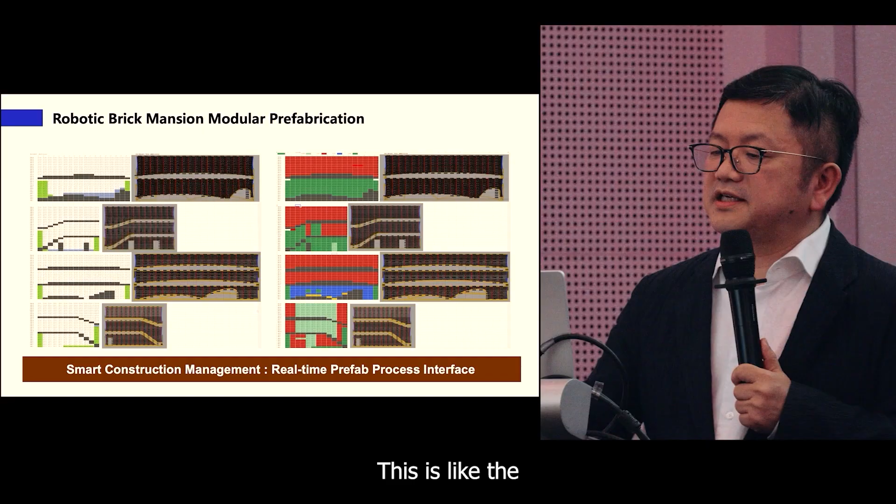This is like the modular prefabrication pieces, and planning them based on the fusion of how to fabricate them, by real-time measuring day by day.

Last but not least is another project I presented at the 2021 Venice Biennale, because it's in the rural area of China. I extremely like it because this is mainland China, the rural area, surrounded by bamboo forest. But we introduced timber robotic fabrication and also brick masonry, local bricks, to fabricate this building.